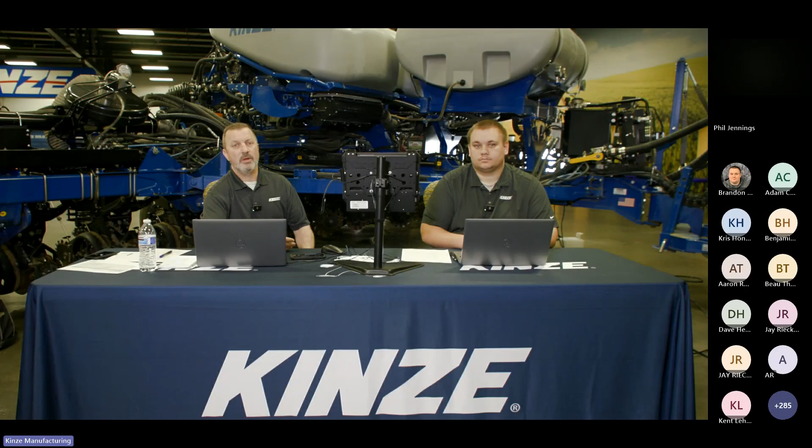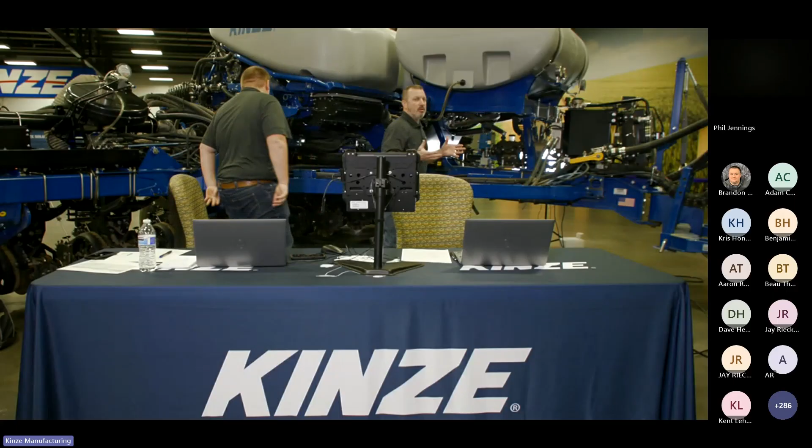So right behind us, guys, the fertilizer tank package, what we will call a single product. That's where we're going to start. The base machine fertilizer package, if you want to call it that, is single product.

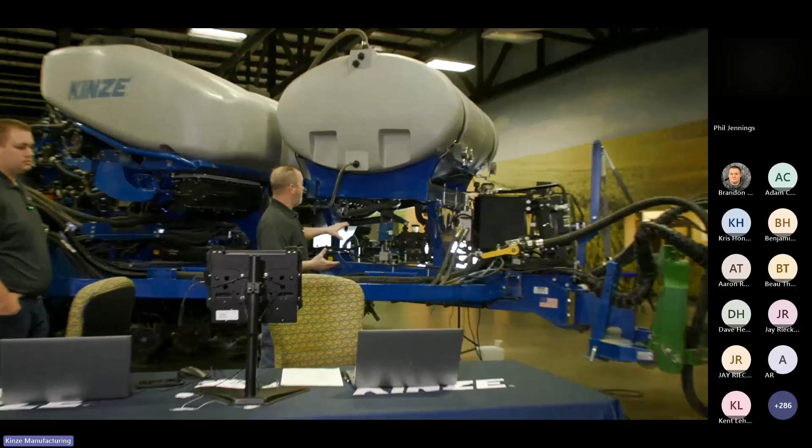Our tank is mounted on the planter, and all of our pump and our controls, if you will, are mounted underneath the tank. So it's pretty self-contained. Those single product packages are also going to give you an auxiliary input option.

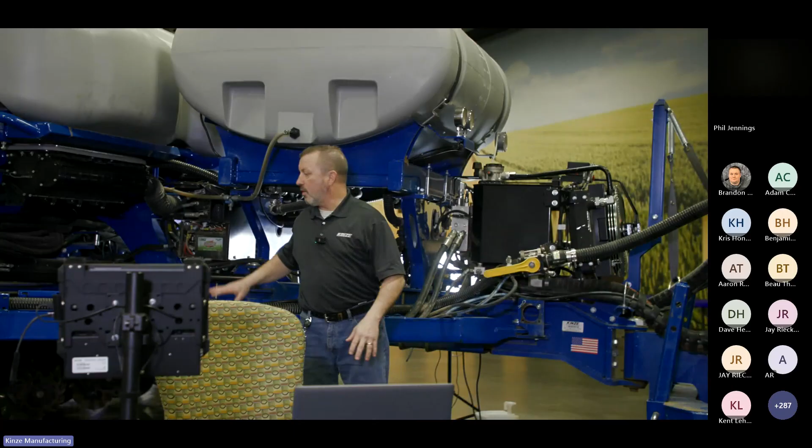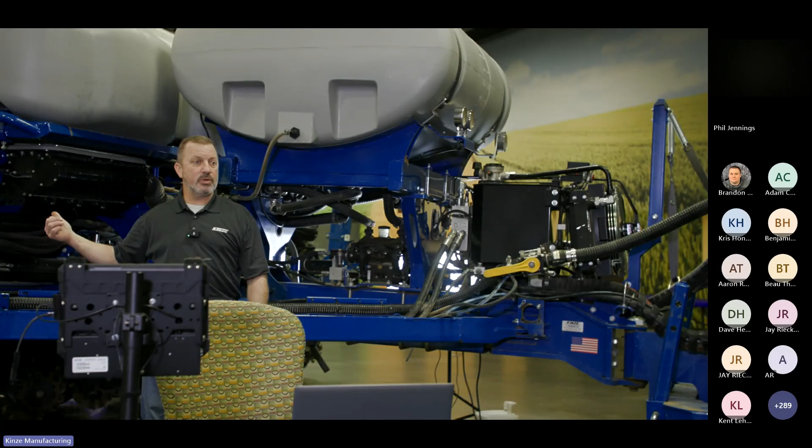So I can run an auxiliary input to the front so I can connect to a front mounted tank, or I could run an auxiliary product out the back so that I can hook up from a trailer being pulled behind. Now note that in all cases, guys, when I have the single product onboard tank, my quick fill will always come out the rear of the machine at your access stairs to the catwalk. So that kind of gives you a little bit of the landscape.

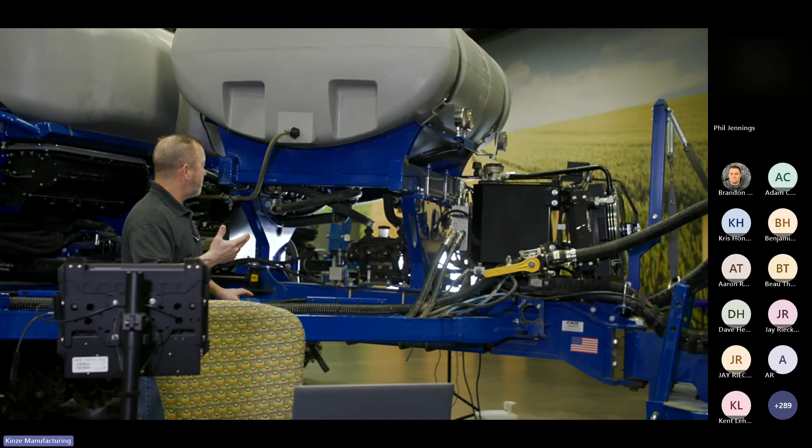I'm going to walk around and look at the other side, guys, and we're going to look up underneath the tank and see what components are in there.

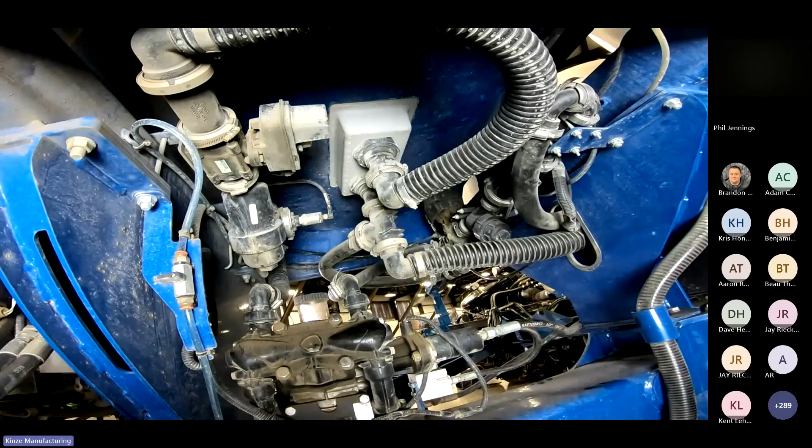Now, as I walk around, I'll let you know that the components we're going to look at may be a little difficult to see up underneath the tank. We're going to look at the same components for our dual product on the back of the planter, so we will be looking at them twice. It's just where they're located and how they're oriented on the machine. So I'm going to grab my flashlight.

Okay, first and foremost, if we follow product into the tank, guys, we come up and into the tank to fill it. So this is our supply line going to the pump. As I follow my supply line in, I have a primary shutoff valve. So when the system is off, that is closed. If I need to check my filter, I can do so. This valve is closed, so I don't have to worry about head pressure off the tank. Guys, the primary filter coming from the tank is a 30 mesh screen. All right, so there's my filter.

Guys, it's hard for you to see, I realize, but coming off that filter housing there is a sending unit coming out of the top. This new system has a suction pressure going into the Blue Vantage so that if I start to plug this filter up, I'm going to get a warning and it's going to let me know that I need to stop and clean my filter before I have performance related issues. So a suction sending unit here.

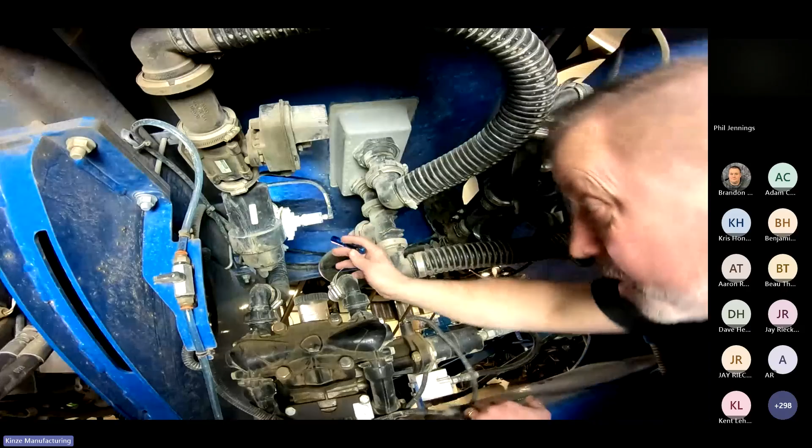Here's my fluid indicator or my product indicator, guys. This has been used before, it's the same as the low level indicator on the tanks. This makes sure that I don't run my pump dry. Even though with these diaphragm style pumps it doesn't hurt them, it's not as critical as we used to know it being with the centrifugal pumps, but we're still going to make sure that's an added safety.

Inlet to the pump. All right, so now we have product to the pump. Guys, the diaphragm style pumps have been fantastic for us, very reliable. Gives us a lot more variability so that we can variable rate with prescriptions at a much wider range of speeds. And the crankcase is completely full of oil. Okay, we should be able to look at a sight gauge on top of the pump and with a quick visual see that there's oil in there and that crankcase is full.

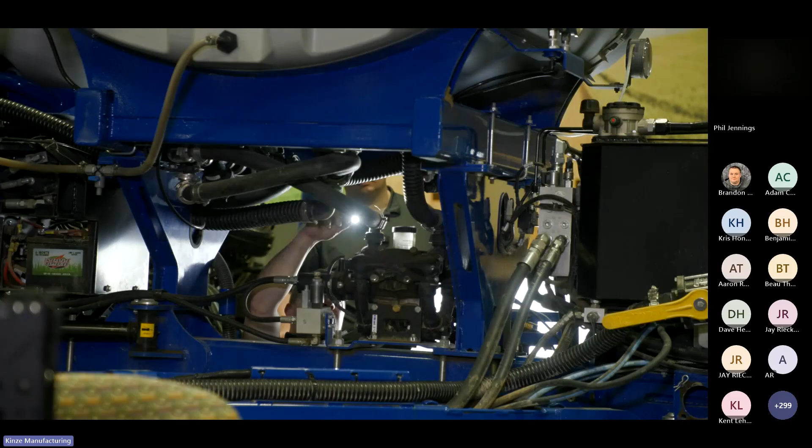Product coming out of the pump - here's where it's going to be difficult to see, guys. As we come up to our main valve for the product when it's running, I'm going to always have a certain amount of recirc coming up here, approximately 4 gallons worth, all the time back into the tank. As I come off of that, I have a filter as well, an 80 mesh filter coming out of the pump.

Guys, here's where it's different, and once again hard to see, but right in here is our flow meter. We'll talk more about that as we go along, because up to this point, to hit all the rates we wanted from low end to high end, we had two independent flow meters going - a low rate and a high rate. We've consolidated those into a single unit and we're more accurate with the readings at all those flow rates. It's an EM, or electromagnetic, flow meter. So that's a change for this year, and it's really simplified the system.

As I come off of that, I have two pressure outlets - the transducer that gives me rail pressure to the Blue Vantage, and then the line that gives me the gauge we can see from the tractor as a mechanical reference to the pressure, and then out to my rails.

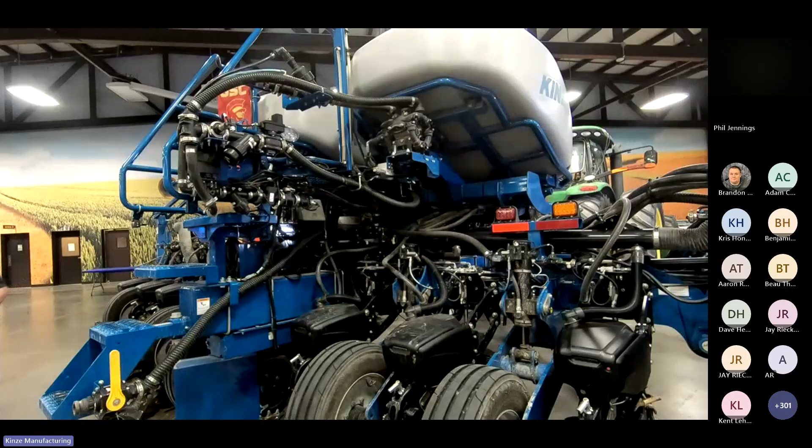Dual product has been asked for quite some time - guys have done it with aftermarket products. We still want to capture that data and make sure it's giving us everything we want, and control through the Blue Vantage as well. So in this particular case, what I described as an auxiliary hose going up front is our primary for product number 2. That product number 2 coming in - same components, guys - I'm coming in, I have a main shut off so that when the system isn't being used, I don't have anything coming into it from the supply line.

Primary filter is my 30 mesh, still the same. Here's that suction transducer we talked about - a little easier to see here - this is what's going to give us the indication if I start to have foreign material plugging up my primary filter. In this case I also have my product indicator, or my safety, going up to the inlet of the pump. Now, what have we got here?

Well, if we come back out of the pump, it looks like there's another filter housing at the top. Guys, that's an air purge to make sure we can get things primed effectively. We come out of that and have product coming down in, and here's our flow control valve - this is where I get my recirc back, that 4 gallon we talked about. In this case there's no sump on a tank - we're going right back into our primary input line as our recirc, okay?

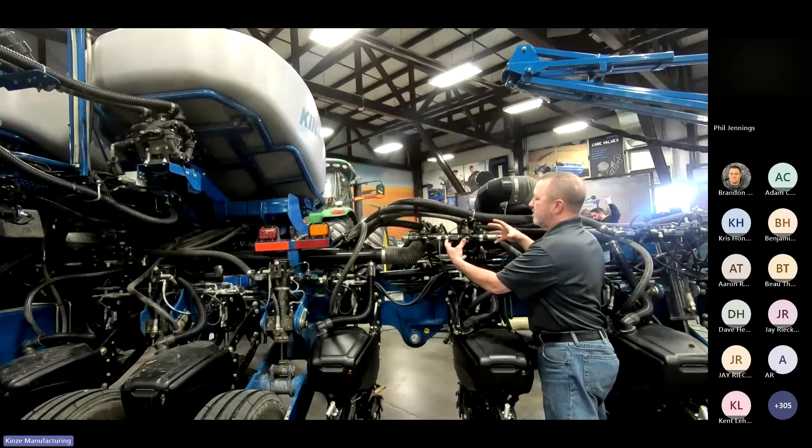All right. The other thing that's probably good to mention, guys, is manifolds. One of the things that has changed over time is how we do the manifolds on the toolbar. And am I still in frame there? Okay. Guys, and I'll move a little bit, but you'll notice that I've got short chunks of manifold, right? Instead of having each one on individual row unit, we've condensed them for easier serviceability, right?

If I need to change orifices based on application rate for a product, I'm going to be able to do all of my section right here rather than having to go row to row to row. So it's a little bit of a different philosophy than maybe where we've been in the past. We've had these for a couple of years now, but it's really proven out. And also, as we talk about a dual product, it's given us more room to do that.

Okay, so effectively right here, I have two identical manifolds. They will be labeled as product 1 and product 2. So when you get back to this point and you can't tell the difference, they will be labeled. But we can do it all in very small areas of work, and the same going inboard. Okay, so we are trying to do some different things to make it easier from a serviceability aspect as well.

Okay. How many GPM recommended for the second pump required? Is there a PWM in place for that pump? Okay, good question, guys. And actually, this is the one that might be easier to see, well, either place. But yes, pump control is still PWM controlled. Okay. Brandon's playing cameraman a little bit here too.

But on the second product pump here, you'll notice it has a very similar look. It's a manual override PWM valve. So normally we're going to have these screwed all the way out, let the controller run it. If we needed to check it, we could turn it in and manually start that pump and make sure we have hydraulics there. So they are PWM controlled.

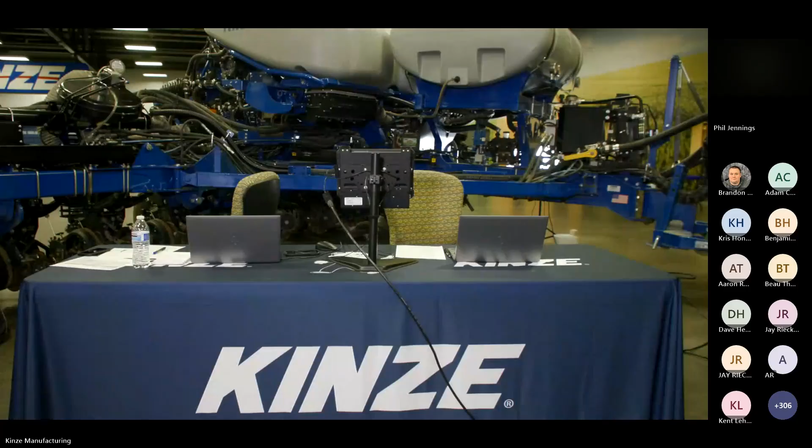Like I said, quick orientation on where things are located, guys, and recognizing that we have some very comparable components on both systems, the product 1, product 2, as we keep calling it. Brandon, you've got a list put together there on what is the same and what's different. Why don't you bring that up for us? Yep. Give me 1 second here.

While Brandon's bringing that up, we do have another question. Has Kinze considered, or do they offer, a bracket for sprayer tips to apply herbicide? At this point in time, the answer is no. All of our product application has been in, I'll call it, a stream or an open-ended applicator, like an in-furrow applicator. Even though we're running through an orifice and carrying a rail pressure, we're not doing it through a spray tip. So at this point in time, Kinze does not have anything to offer in that regard. All right.

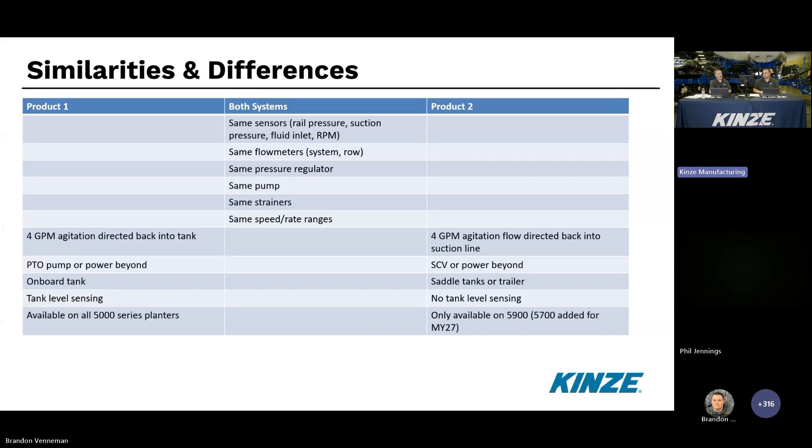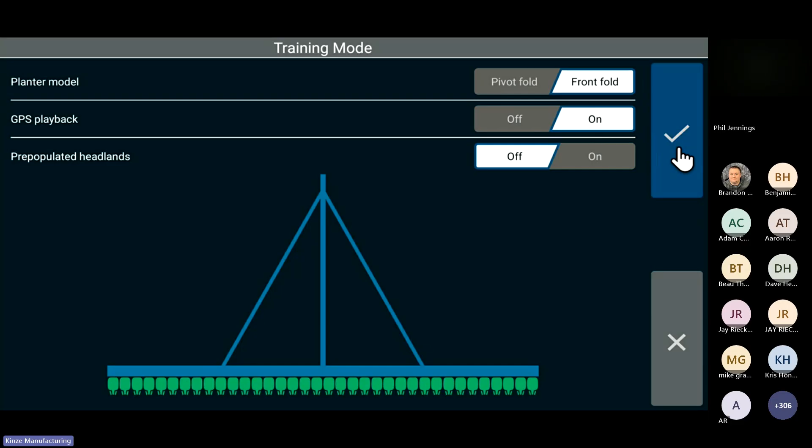I think what we'll do next is start looking maybe a little bit more in depth at the pieces and the parts within how we make the settings and adjustments. So we're going to jump into our Blue Vantage display again and use that to move forward with the conversation. The Blue Vantage, we've tried to push that all week, guys, is really a go-to spot. That's where the guys don't necessarily have to keep the operator's manual out and everything else, because we're building all of those self-help features, diagnostic features into the display. So if we go into training mode again, which is settings, and then find your training mode, we use this all the time. We continue to encourage you guys to use it with your customers as well. So Brandon's firing us up a 5900.

So getting into a task in this case, we can go in here and we've got our fertilizer turned on, product 1, product 2. How do we set it? I'm going to tell you that my product 1, I'm going to run as my in-furrow. Okay, so product 1, in this particular case, I've got an in-furrow applicator. I want 5 gallons to the acre. It looks like you're already there. But if you go in and look at your application rate, guys, you can go up or down with it.

Okay. And back up just a minute. How did we get there? All right. I've got my normal application rate there. Doesn't do it automatically. It's a trick question, Phil. Guys, we still have to apply the right orifice so we keep a rail pressure for the rate range and speed range for the machine. And if we don't know what that is, there on the left-hand side, guys, go to the chart. It's built in.

So here's where we can, number one, check our row spacing. In this case, I'm working on a 30-inch 5900. I'm going to tell you that rate ranges between 4 and 6. I can run a prescription for each product. So if I was running prescription, I could put my rate ranges in there. And how fast am I running? Predominantly we are going to run in that 7 to 9 miles an hour. We may see some a little bit less than that, but typically not running much over the 9 mile an hour category here at home. So that gives us the range.

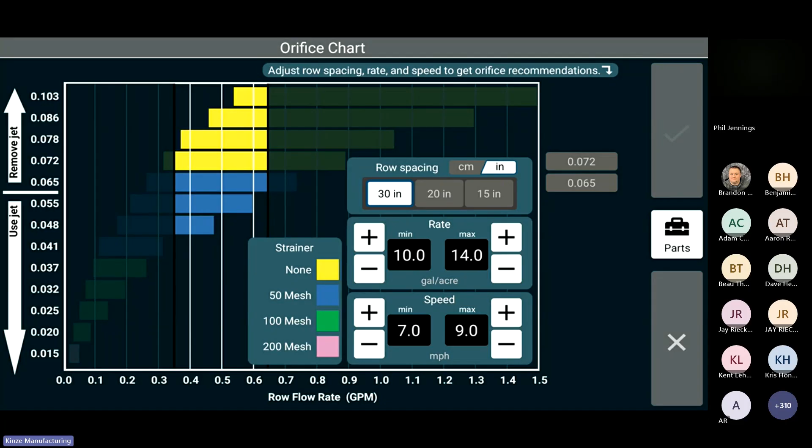So let's look at the parts. All right, here's what we keep talking about: strainers and flow manifolds. These are the ones that are on individual rows, or condensed on the manifold to control individual rows. It's a standard TeeJet, on and off—this is a row shutoff for us. If our seed turns off, the fertilizer turns off. Everything's keyed off of the seed command.

It shows our jet orifice in there. This is what's focusing that stream of product for the lower flow applications, to make sure the flow meter inside, or the spinner if you will, continues regular, consistent movement at the lower application rates. As we get through the flow manifold, we've got our strainer and then our orifice. There is technically a directional flow for the orifice—the side with the stamping on it should be pointed downstream, towards your outlet. We've seen orifices just laid in there on top of the gasket, but technically, if we're changing orifices, it should be installed within the gasket and then applied to the body of the manifold.

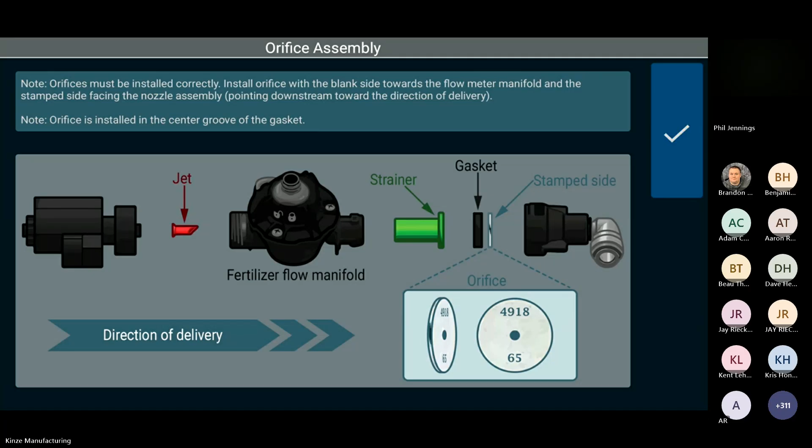Okay. All right, looks like we've got everything in place for product 1 and product 2. Is that all we need, Brandon? Yeah, believe so.

After that, guys, the task setup page will also give you that summary statement - what have I got, what and where - and gives you those reminders as far as what the setup parameters are going to be. So we're trying to make it as easy as possible without opening a manual.

Guys, with that, let's walk clear through a system, different components, the setup requirements, recognizing that we've got a lot of opportunity. Single product, that auxiliary is going to be front or back. We're always going to have the quick fill on the back of the planter. Combinations thereof oftentimes are going to be very localized. So if you've got questions as far as setup or customers that have specific application concerns, don't hesitate to give us a shout. We'd be happy to help walk through that.